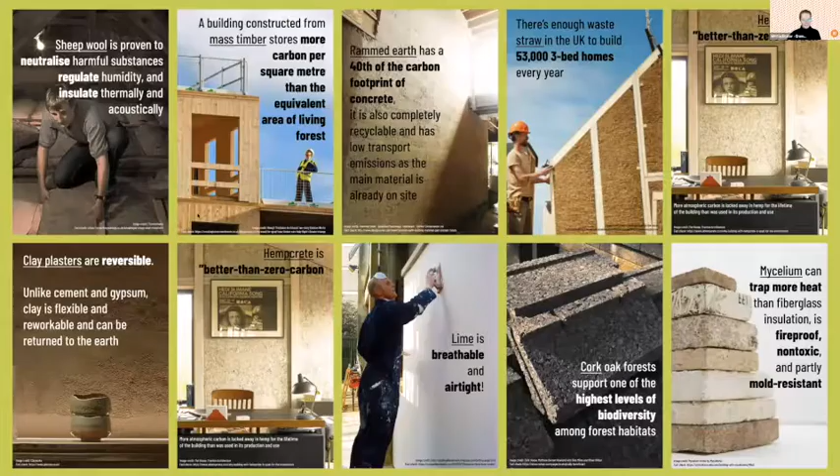Thank you, Steph. We're so glad to welcome everyone to this next event in our series of masterclasses in building with natural materials. Building with natural materials is one of the most powerful ways in which we can transform the built environment industry from being damaging and carbon intensive to something that's regenerative and truly restorative for our climate and ecologies.

We need to be looking not just at how we can reduce the damage that architecture, engineering and other built environment professions are causing, but also how we can actually be a positive force restoring the damage that we've already caused to our planet. Tonight we are focusing on hemp.

A couple of fun facts for you. Hemp is one of the fastest growing species on Earth, along with bamboo, and it has over 25,000 useful end products, from paper, textiles, rope for ships, medicine and oil, amongst many other things, some of which we're going to hear about tonight. It's estimated that for each tonne of hemp fibre grown, 2 tonnes of CO2 are absorbed and sequestered.

It's 6 times as strong as cotton, and in the 16th century, Henry VIII even made hemp cultivation obligatory as he wanted it for the production of rope.

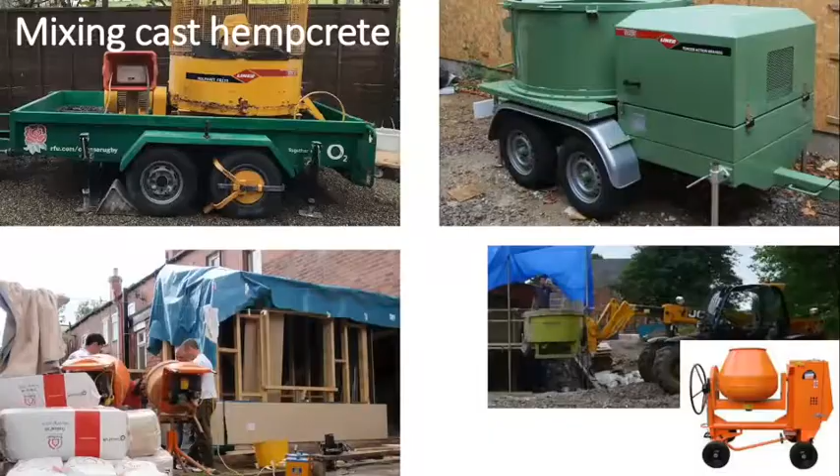I started, as most contractors do, with cast hempcrete. The lime binder and hemp shiv are mixed together with water, and these are all examples of mixers that will mix cast hempcrete on site.

You mix the ingredients together, which doesn't take long, and out comes the hempcrete, which you take in buckets to the shuttering, and in it goes. A light spread around and a prod, and you're ready for the next bucket load.

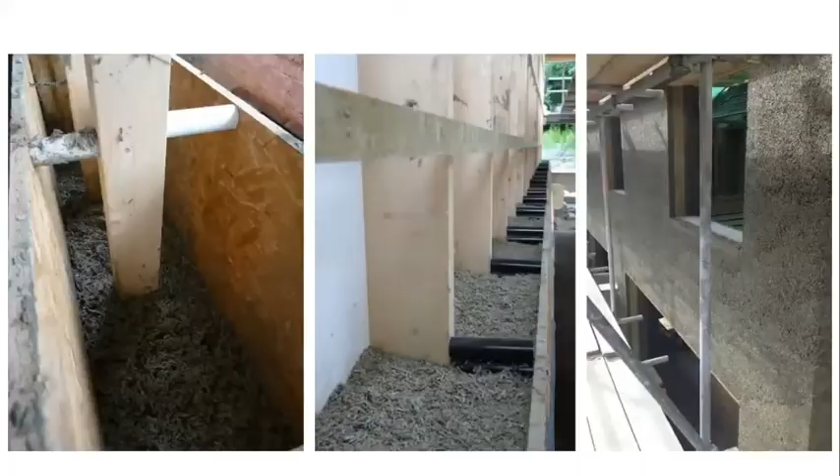You have a choice of where to put the structural frame. In the left picture, it's placed centrally. In the middle picture, it's to one side, which could be internally to take heavy fixings or externally to take cladding. And in the right-hand picture, it's placed slightly off-center towards the outside, which was dictated by the plinth design.

The hempcrete with a frame centrally or slightly off-center needs no extra support. It's engulfing the frame and can't move away from it. When the frame is to one side of the wall, the hempcrete could effectively be forced away from the frame. So as a precaution, you can see in the middle picture there are horizontal battens placed at 600 to 800 mil centers, which provides something for the hempcrete to cling onto.

The shuttering is usually OSB. It's set up like so. It's filled, then the same shuttering is moved up the wall to continue the work. The spacers cut from waste pipe are also moved up the wall as work progresses.

Shuttering can also be one of the purpose-made shuttering systems. This one that I use is extremely easy and quick to use and very solid.

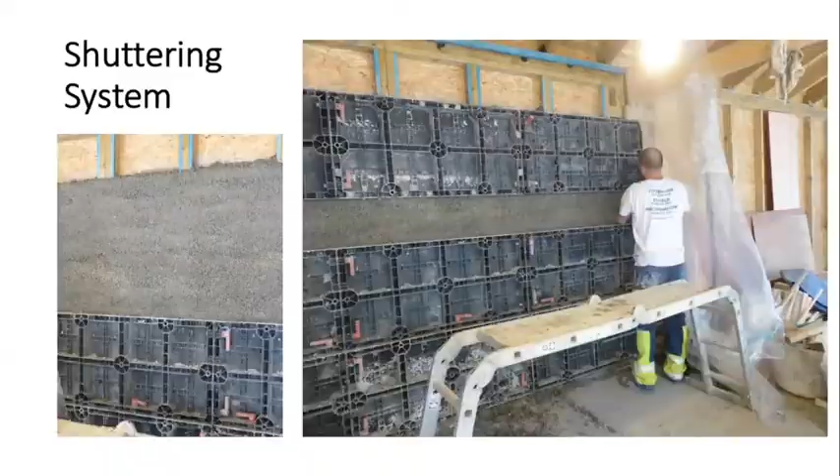My favorite thing about cast hempcrete has got to be how easy it is to plaster or render onto. It's such a nice surface to put finishes on. It's overall very flat, but also extremely textured for the plaster to cling to. And there's just the perfect amount of suction or water absorption from the hempcrete so that you can progress quickly, but without having to rush.

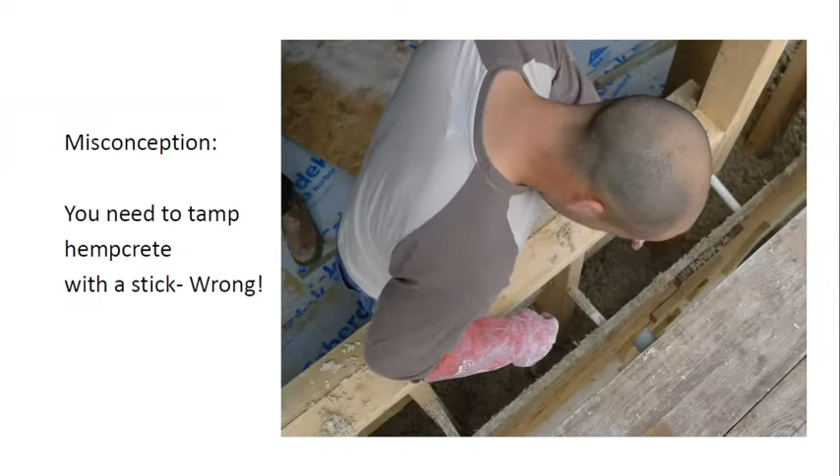A misconception with cast hempcrete is that you have to tamp it with a stick. This is not actually necessary, and it's more efficient and easier and gives better results if you use your hand. The key is not to pour too much in at a time. So you should spread one gorilla tub between about 3 of the spaces between the studs, then spread it around with your hand and give it a prod around the timbers and around the shuttering, and that's it.

Cast hempcrete is beautifully simple, but there's a lot of labour involved. And as a contractor, it becomes difficult to continue to get the casual labour you need and to manage it when you do get it. This for me was the main driver to start looking at spray machines.

Now, it would be very unfair of me to talk about sprayed hempcrete without first mentioning my good friend Graham Durrant of Hemp Lime Spray, who's put more hempcrete into buildings in the UK than the rest of us hempcreters put together.

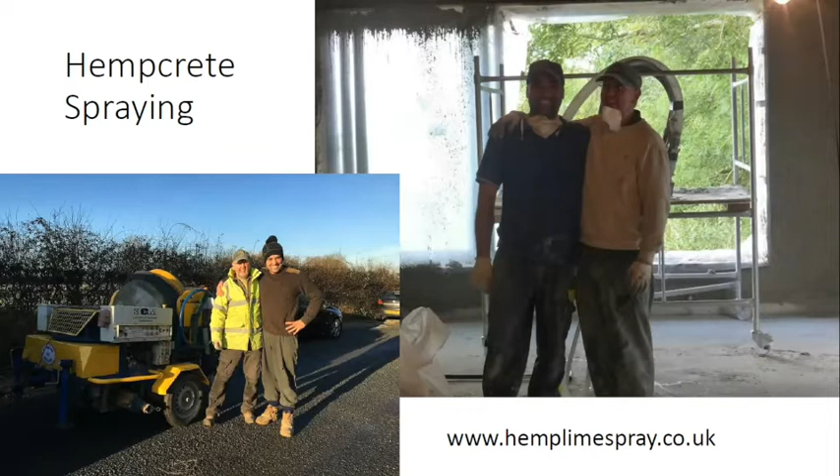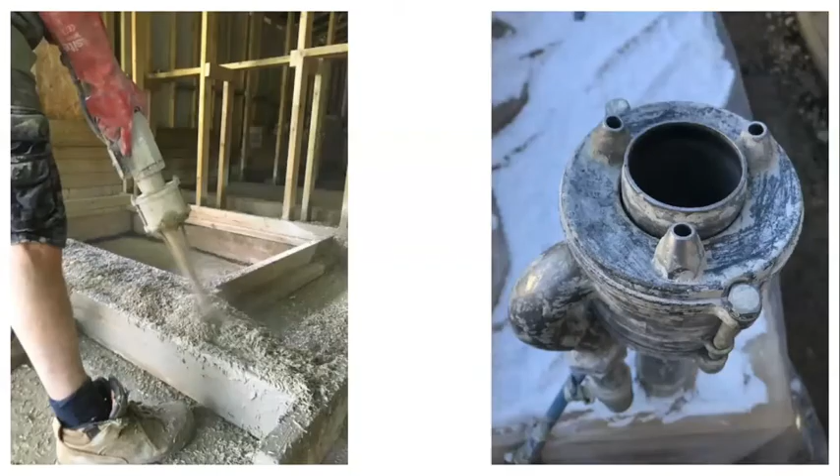The hemp and binder mix in the air between exiting the lance and hitting the wall or substrate. The binder is forced out of 3 nozzles by the compressed air, and the nozzles are angled in towards the central stream of dry hemp, as you can see here. Although it can get messy if you're not careful, it's actually quite controlled, and you can see there how close Jamie's boot is to the lance, and he's not getting covered.

Just as in cast hempcrete, if the frame is central, you need no further support. But if the frame is to one side, as in this build, then you need some extra battening for the hempcrete to cling onto and avoid any possibility of it separating from the frame.

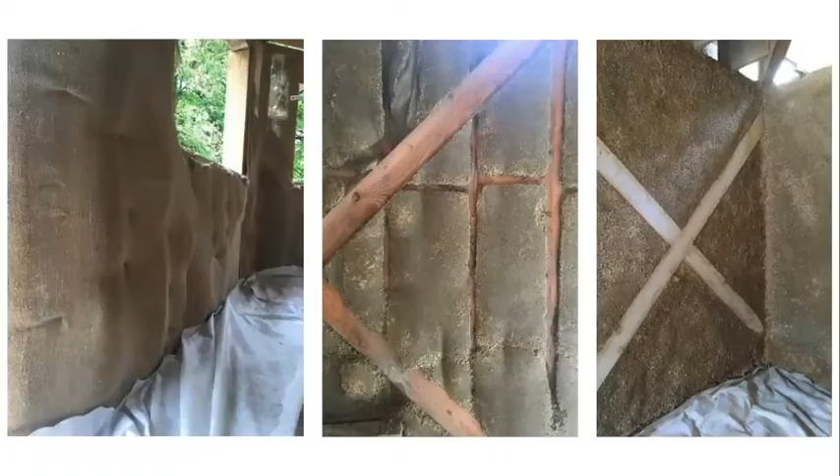Shuttering for sprayed hempcrete is very quick and can be as simple as hessian pinned to one side of the frame. The hempcrete is then sprayed onto the hessian. This is left overnight, then the next day the hessian is peeled away, as in the middle picture, and the rest of the hempcrete is then sprayed from the other side of the wall onto the previous day's work.

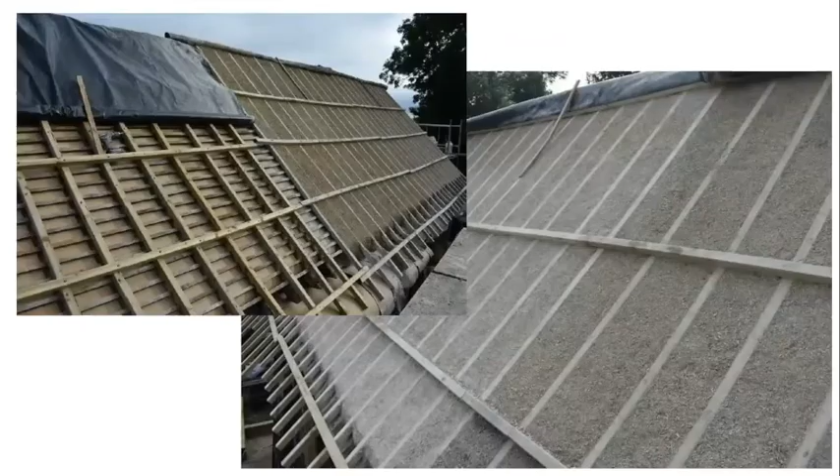Once you're happy that you're near enough flat with your walls, you get a long piece of wood, which you've banged lots of nails into to make a long and very technical scratchy stick. Graham Durrant currently has patent pending on the scratchy stick.

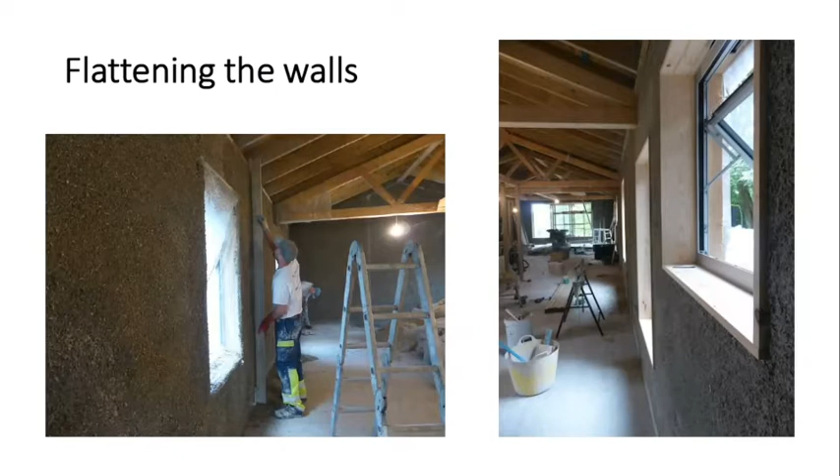You run it over the wall using predetermined guide rails that you've sprayed into the wall, one at the top and one at the bottom. If you're doing an old place with wonky walls, you can spray freehand and just tidy it up at the end with a nail float so you can keep the original contours of the wall.

Some people assume you cannot spray crisp corners and flat walls. These are a couple of sprayed window reveals on a recent build that disprove this.

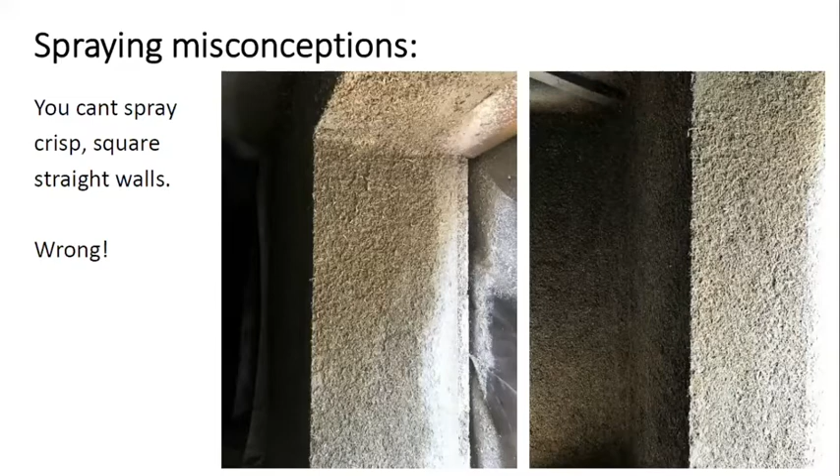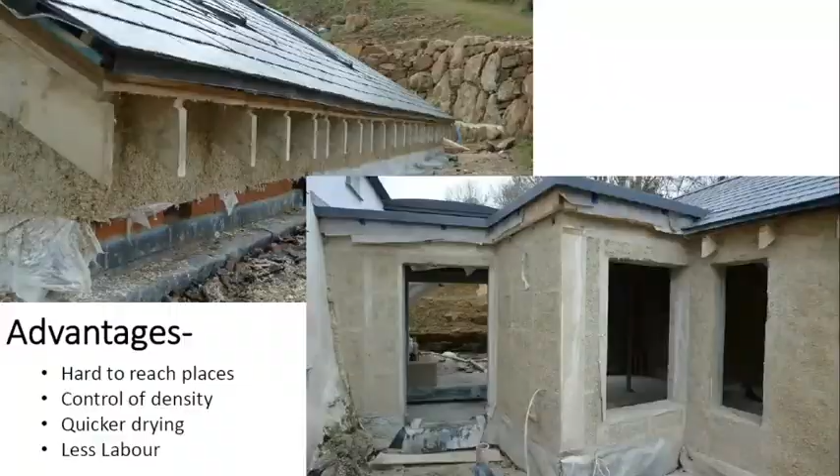Sprayed hempcrete is no quicker than cast hempcrete, but it takes a lot less labour, removes the need for carrying gorilla tubs, and in my experience, it dries quicker. These are just a couple of examples of some sprayed hempcrete buildings.

I set up production there a few years ago and it was pretty successful, but unfortunately they've had to scale back during the pandemic and are not currently producing UK blocks, although their website is worth a look at for clay blocks and other natural materials. They are, however, the main stockist for the Italian blocks imported by the Hemp Block Company, the idea being that as soon as there is enough demand, they will start up production again using the Italian recipe under license.

The main drivers for using blocks are that they are already dry and they're non-specialist. Anyone can use them and the tools are very simple and widely available. It's basically hempcrete for the masses.

The mortar is a lime mortar. It can be mixed in a cement mixer just like sand and cement, but it's sand and lime. Pretty much any lime mortar is suitable, and if you're using the giant blocks, which have a mortar line straight through the wall, you can use an insulating mortar, which has lightweight aggregate instead of sand.

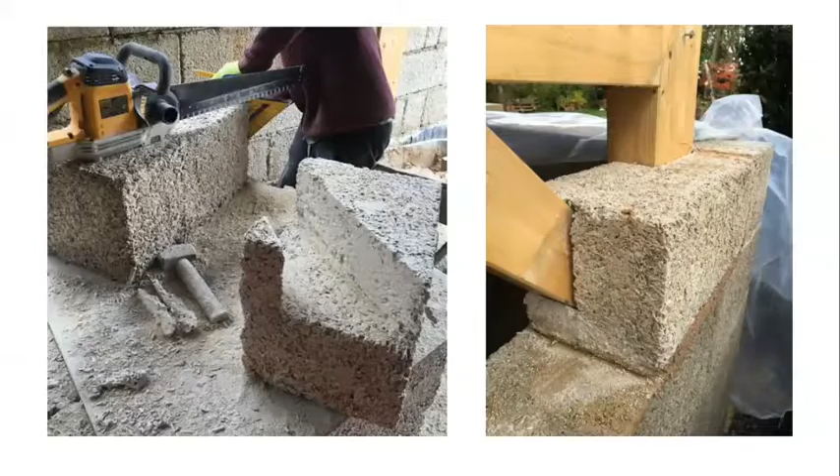The blocks are cut very easily with a hand saw, or as shown here, an alligator saw, which can do some quite elaborate cuts.

And you can find all these sections you can download from www.hempblock.co.uk.

Blocks with a portal frame is my favoured way of using them. It's incredibly simple and easy to construct and very fast.

In this build, which was built by Midlands Heritage Builders, the blocks are set 25 mil off the frame, so that once plastered, it leaves a 5 mil shadow gap between the frame and the plaster, which architects tend to go mad for.

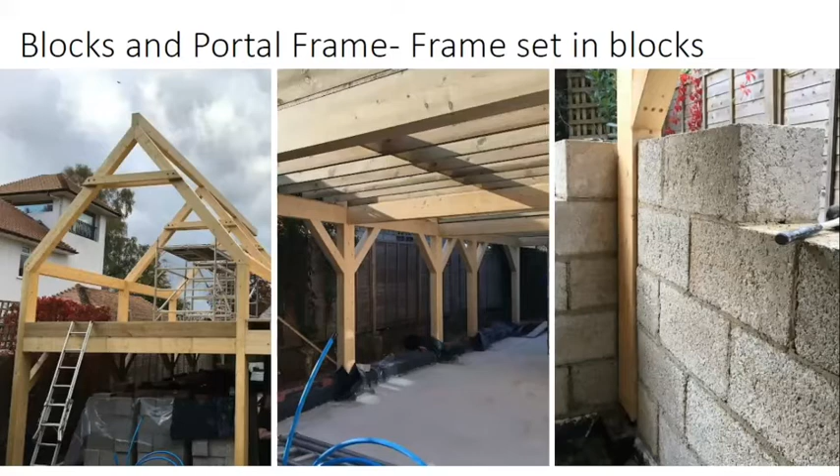You can also set the frame into the blocks, but still have it on show, as in this build. So if you were thinking of having a feature frame anyway, like an oak or glulam, then I'd really recommend looking at the giant blocks and this way of building.

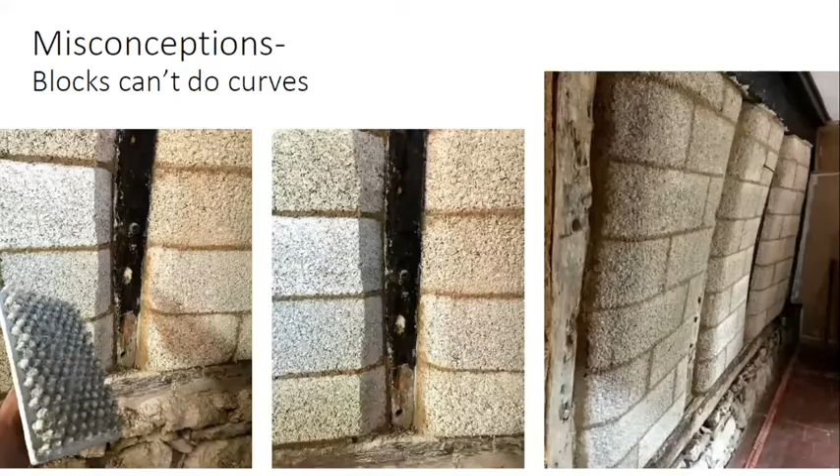I'm increasingly using blocks as a permanent shuttering for sprayed hempcrete. They're built up usually on the inside of the wall and either cast or sprayed against from the outside. This means the inside of the house is already dry and ready for plastering, whilst maintaining the benefits of monolithic construction that the cast or sprayed hempcrete bring.

On the left there, you can just make out the blocks on the inside of the frame and the spray on the outside.

So really the three types are very similar and can be used in much the same way. Cast is specialist, but still very simple and accessible for self-builders. Sprayed is easier for contractors to manage due to the much reduced labour required, and comes into its own when projecting it at an existing wall as solid wall insulation. And the blocks have massive advantages in being dry, but are also completely non-specialised and accessible to all.

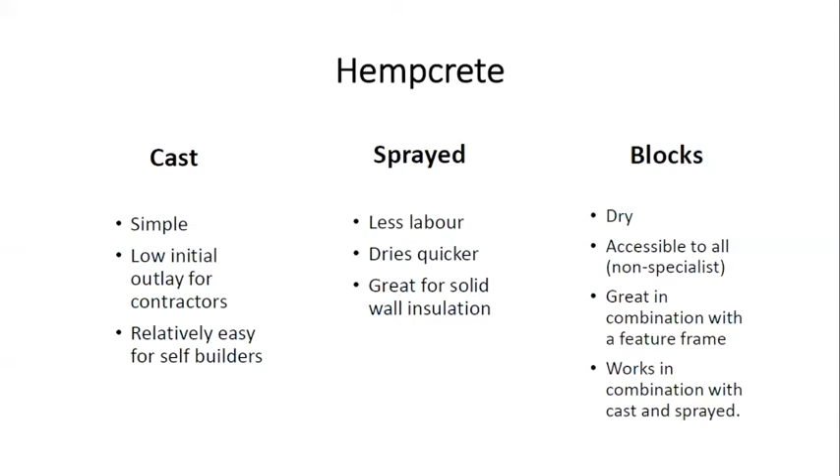I'm going to look at some construction details now. It's difficult to do them in depth in the time we have, but we'll look at a few common details.

The first is racking strength, or stiffening of the frame. The rule here is to avoid using boards such as plywood or OSB. These boards are generally very impermeable to moisture. They'll cause a condensation risk in an otherwise breathable wall and will generally not let the hempcrete perform as well as it can.

As moisture travels through the wall, it hits these boards and will slow down. In the case of plywood, it would just stop. If the board is cold, say towards the outside of the wall, the moisture will then condensate and cause damp. So the rule of thumb would be to have more insulation outside of the board than inside of it, so that it's warm.

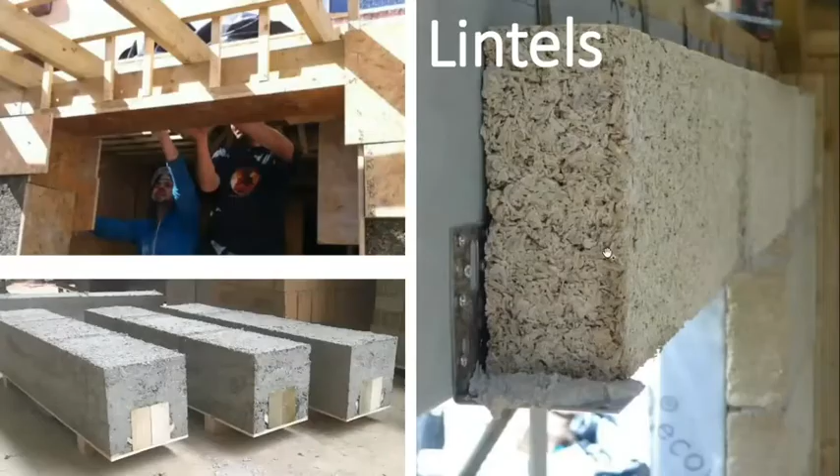Sprayed and cast lintels for sprayed and cast hempcrete are very similar. The stud frame will always have its own structural lintel in place, so you're really just making sure that the load of the hempcrete transfers across the opening or back to the structural lintel.

For small openings, top left, you'd build your hempcrete up to either side of the lintel. You'd then place a 2x2 or 50x50 mil batten in the middle of the hempcrete section, right the way across and projecting 150 mil into the hempcrete. Then you'd cast this whole section in one go without stopping, and the 2x2 batten acts like a rebar. For a larger opening, for cast or sprayed, you would screw a slightly bigger timber to the structural lintel, and again cast or spray it in one go. This transfers the load to the structural timber frame lintel rather than the hempcrete on either side.

For small blocks, the load is transferred back to the structural lintel as shown on the right hand side, with stainless steel L brackets at each block joint. So that's very simple.

And for the giant blocks around a portal frame, precast hempcrete lintels can be produced, which are reinforced with structural timber as shown in the picture on the bottom left.

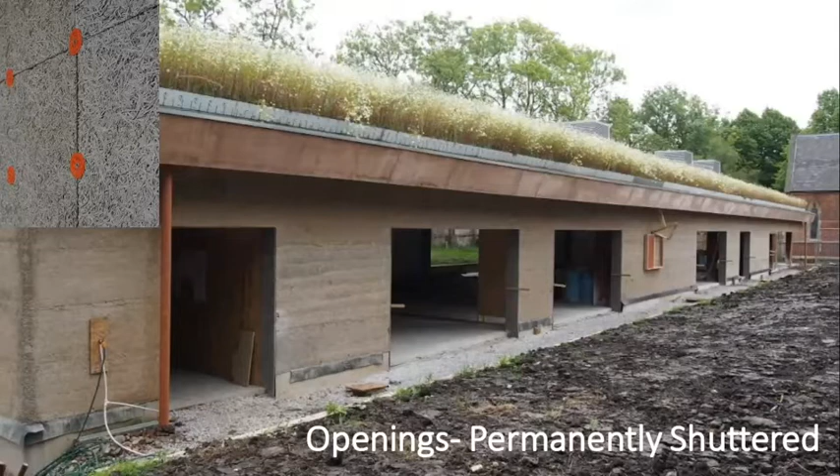I prefer using wood wool board because it's the same texture and porosity as hempcrete. So when you're plastering or rendering, you can treat it the same as the hempcrete and you don't get cracks that would otherwise be risked by using a dissimilar material or board.

These windows I've permanently shuttered with the finished timber surrounds and sprayed up to them. I left enough space for the plaster to finish flush with the timber window surround. Then a kind of face frame, a bit like an architrave, was fixed onto the front once the plastering had been done, so that was very quick and easy. The boards were put in place before I hempcreted, sprayed against, obviously they were protected, and they're there once you take the protection down.

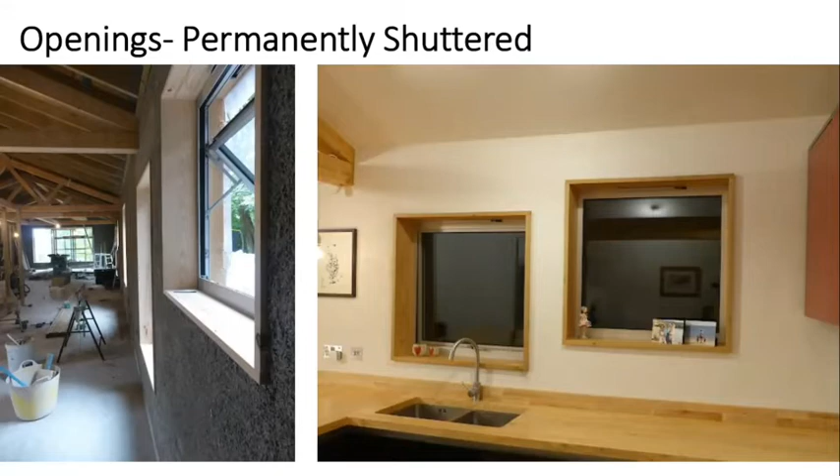Then the rafters are full filled with blown cellulose insulation, which is blown in under pressure and meets the back of the hempcrete wall, further increasing the air tightness.

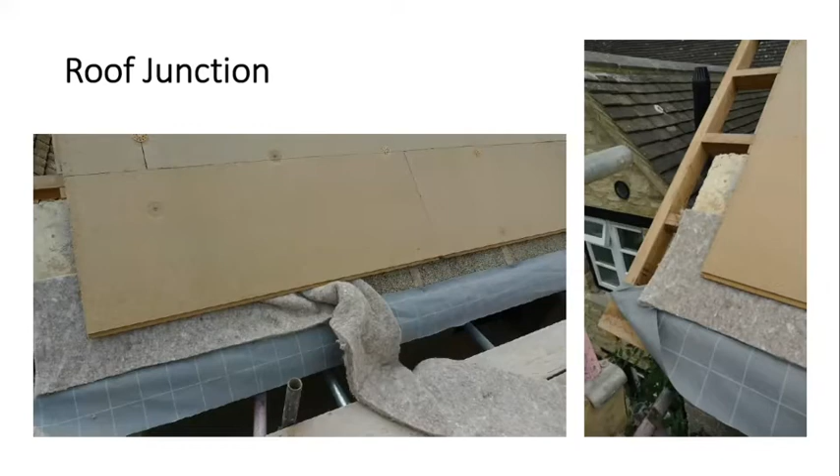There are so many ways a plinth can be constructed. So for now, all I'm going to say is that it must keep the hempcrete at least 250 mil off the ground if the hempcrete is to be rendered.

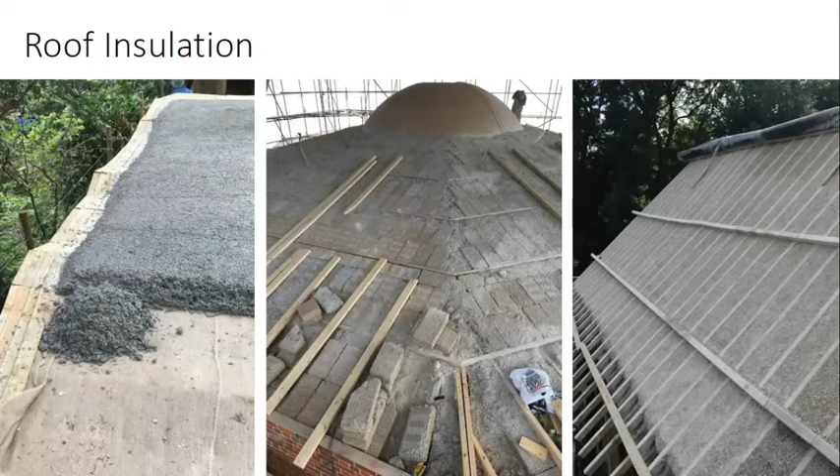Sprayed, cast and blocks can largely do all the same roles. They can all do walls and roofs. Cast roof on the left there, block roof in the center, and a sprayed roof on the right.

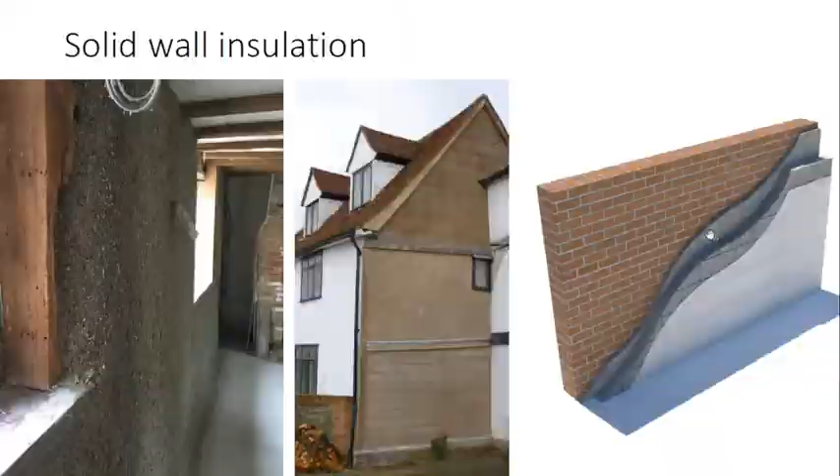So let's compare them on cost. The easiest way I thought I would do this was to look through my back catalogue of jobs and see what I actually charge my clients. For each, I've noted down my lowest and highest price I've charged for sprayed hemp, cast hemp, and the hemp blocks. This is a supplied and fitted cost and is per cubic metre. So if you want to know it per square metre of wall, you'd have to divide the cost by the thickness of the wall in metres.

As I could have guessed, the spray comes out cheapest due mainly to the lower labour cost, followed by blocks and then cast.

What was interesting is that the larger the block, the cheaper the price per cubic metre. The giant blocks were at the lower end, £450 per cubic metre fitted, and the price increases for smaller blocks. This is because it takes roughly the same amount of time to lay an 80 mil thick block as a 160 mil thick block, but you get twice the hempcrete. It's worth considering though that this is what I would charge, and your local builder could install the blocks for a lot less than I would.

Also bear in mind that if you lived far from someone who owned a spray machine, say in North Wales, but close to a local hempcreter, let's say North Wales' very own Hempcrete Cymru, then the cast hempcrete by your local Welsh lad would probably be cheaper than me travelling from the southeast of England with a spray machine. Quick shout out to my cousin Jasper and his business partner doing great things at www.hempcretecymru.com.

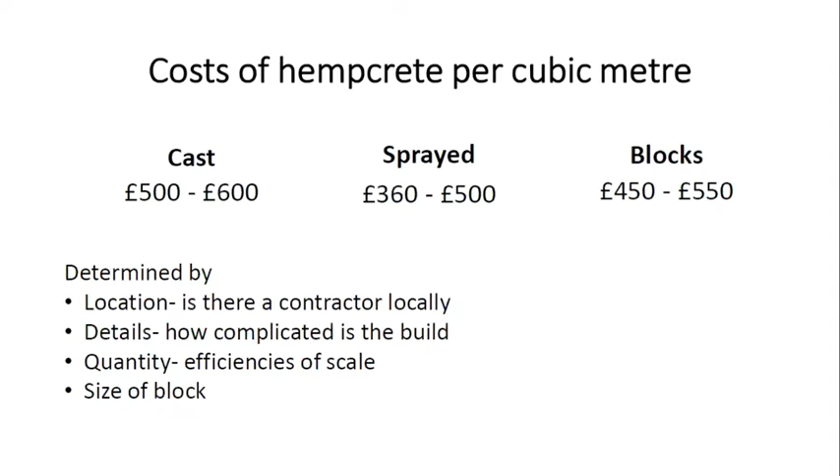Don't forget, you can mix and match in the same build and combine hempcrete with other natural materials. So on that subject, I've been asked to say a little bit about mortgages and my experience of self-building and mortgaging a hempcrete house.

There's a certain material that can help with this. I know some people struggle with natural materials and mortgages, but that can sometimes be the way they approach and present their build to the mortgage company, saying things like, hey, I'm building a hemp house. And the mortgage company say, what the hell is that? And they close the door.

But in fact, you're not building a hemp house. You're building a structural timber framed house with natural fibre insulation called hempcrete, externally finished with lime render or timber cladding. And then they say, hey, we deal with timber frame buildings, please come in.

Of the mortgage companies that lend on timber frame builds, some will state that you can only timber clad a certain percentage of the external facade due to fire risk. Other than that, the lenders say it must adhere to building regulations, be insurable and have a 10-year structural warranty.

So really then your main problem is finding a warranty provider and seeing what their criteria is. But it didn't take me long to realise they're only really interested in the structure and the external weatherproof finishes. The structure must be signed off by an engineer with up-to-date liability insurance, which is not difficult to do. And the weatherproof finish must be guaranteed for at least 10 years, which can be slightly more difficult.

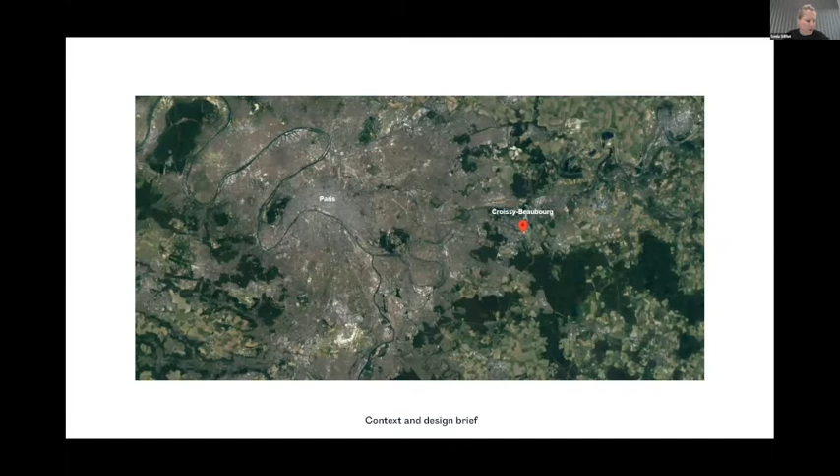Croissy-Beaubourg is a suburban commune of Seine-et-Marne. As you can see, this is Paris and this is Croissy-Beaubourg. The characteristic of this typical urban fabric is a strong dominant residential presence, as you can see here, all over. This is the site and this is the building.

As an echo to the city center, the project is a new multipurpose sports hall located in the center of a set of public facilities. As you can see, here is a school, a gymnasium, and a leisure center.

In addition to this particular context, it's important to clarify that this project is not the result of an architectural competition, as is usually done.

In France, we developed a specific process called procédure adaptée, which could be translated as adapted process. The word adapted is important since it illustrates the aim of adapting a project to a budget beyond any architectural consideration. The scheme is presented as a proposal mainly based on the methodology and capacity of our office to propose a solution able to find the good scale for the municipality.

It means that when we started the contract, we had to design the building, find the right implementation in the context, and define all the characteristics of the future building. So that was the first images that we showed to the municipality when we just started the project.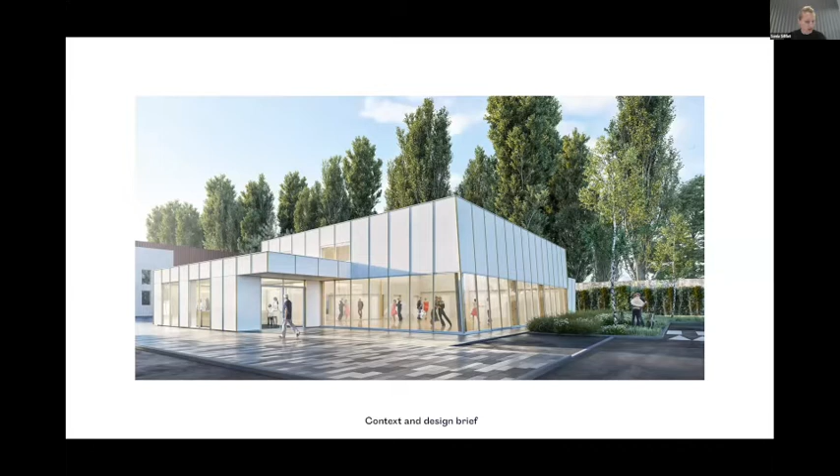In response to a constrained budget, it was estimated in the design brief around 650,000 euros, so almost 550,000 British pounds, I would say.

The structural principle of the project was guided by the desire to use sustainable and multi-performing materials. My engineers proposed that we use hemp block during a meeting.

We had never heard about hemp blocks before. Of course I had seen operations done with concrete-hemp cast in place, but I was not aware of this type of hemp-made product. He described to me all the benefits of using that specific type of material for our project, like versatility, thermal, acoustic, structural, and fire resistance performance.

Also, this was a good point for us: the hemp is grown in France, and the fibers are assembled within 500 kilometers from the project site. So the hemp blocks participate in valuing a short-term sector. Here you can see the building site bird's-eye view.

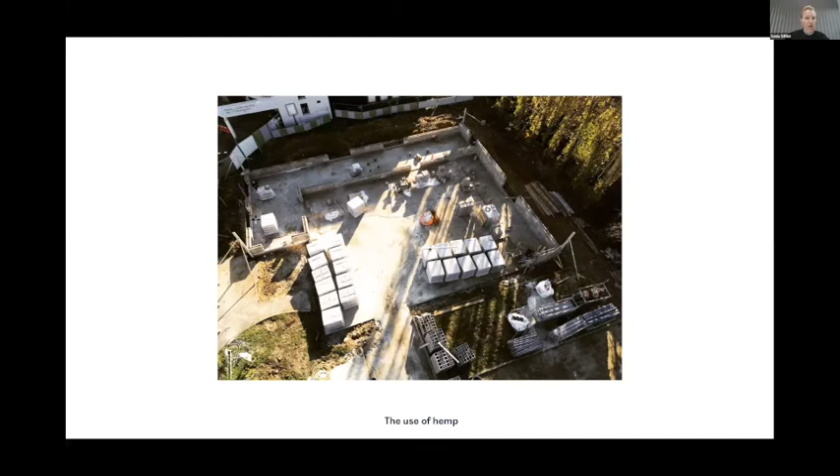The Pierre Chevet Sports Hall is the first public building built with hemp blocks in France. This constructive process was possible to respond to certain requirements. On the one hand, it participates in engaging the actors of the building sector toward an ecological transition.

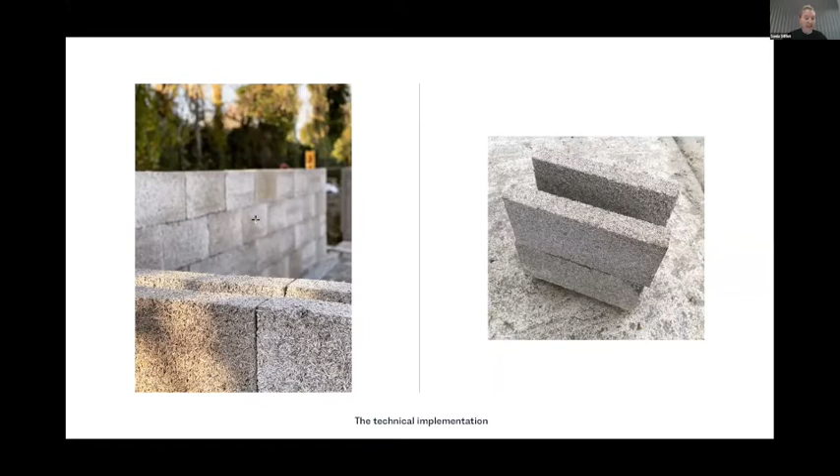The project provided an opportunity to mentor companies in these techniques. On the other hand, the constructive technique does not require specific certification or qualification. For example, on a small-scale project such as Pierre Chevet, small local businesses were not excluded and could therefore respond to the call for tenders.

Similar to our traditional cinder blocks, these products are based on chenevotte, a French word - I don't know how to say it in English. It comes from the inner part of the stem, also called straw, which is then cut mechanically to obtain hemp shaving. This is an agricultural material, until then without outlets.

This base is made very compact thanks to a quick natural cement binder developed by Vicat, a French cement group based in my native region, Rhône-Alpes. This is the picture of the product we use - that one is from Vicat's marketing material, and on the other hand, this is from the building site.

Measuring 60 by 30 by 30 centimeters, the weight is almost 18 kilos, and it's easy to cut. The blocks are not glued, as you can see.

They are just nested together. The funny fact is that the guy working on this building site was a former stone cutter, and he found the same technique that he was using in stereotomy.

So I will explain a little bit more about the structure of the building, how it was designed to free up as much space as possible for this really small project.

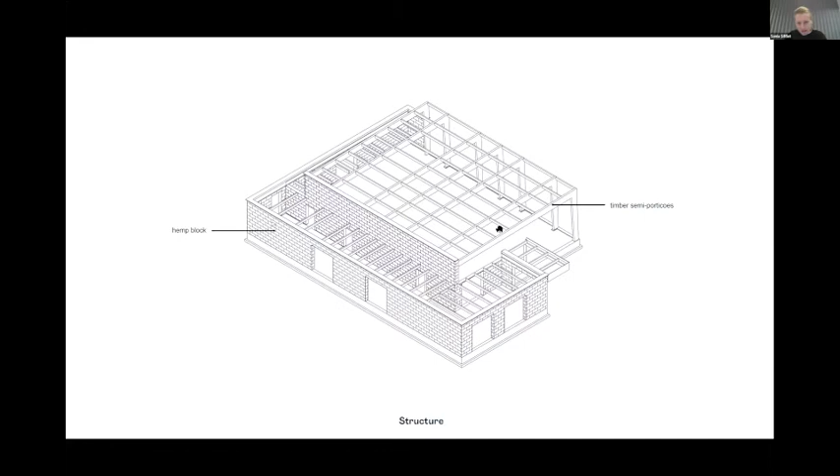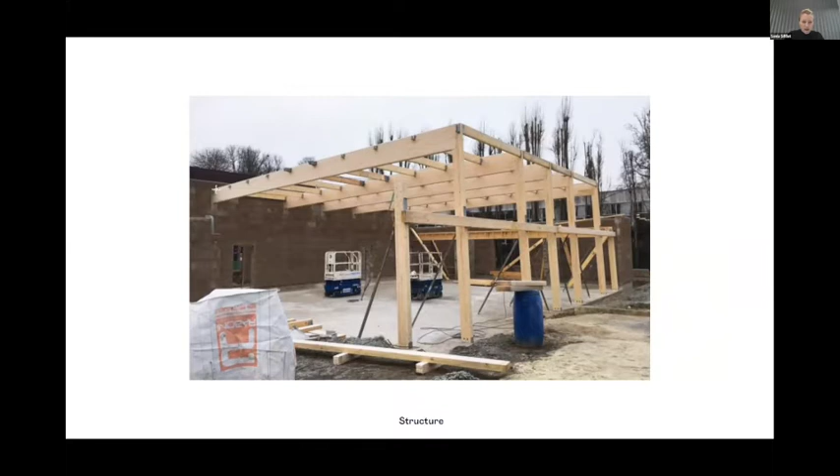So because we wanted to offer durability to the facade, we decided to use full height fiber cement panels, keeping the standard format, as you can see here. That was the starting point to do the pattern layout of all the facade.

But how to attach 10 millimeter thick and heavy cladding panels, almost 18 kilos per square meter, to a hemp wall? Throughout the project, we were able to discuss with the head of Vicat, the manufacturer, who developed the technical requirements for hemp blocks.

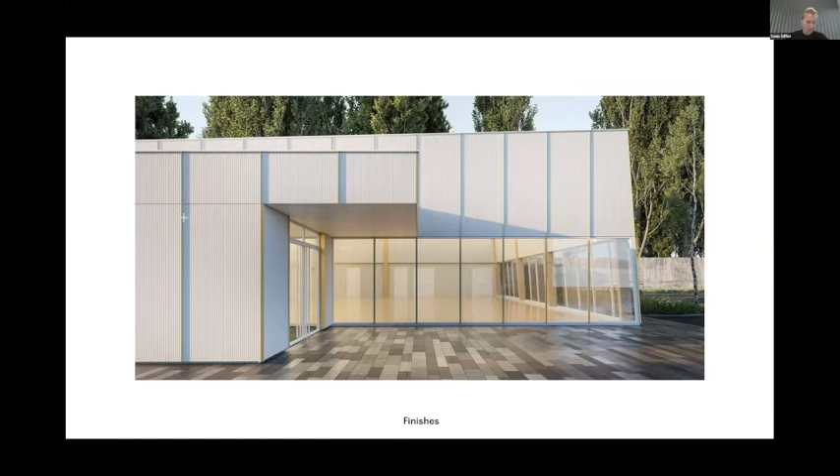I must say this project was a collective work between each partner: our office, the engineers, the manufacturer, the people working on the building site. Pierre from Vicat intervened on that question with the facade, as you can see here, because it was the first time a facade panel was fixed to this kind of wall. We had to review the hook system, as it was impossible to create intermediate points.

The waterproofing was made with a simple primer coat applied to the hemp blocks prior to the panel installation. So that's the final result here.

Here you can see a small section: the hemp blocks here, the primer coat on the outside, the omega metal profile, and here is the front panel. So we started from that small concrete block part here and went up to the top, like 3 meters higher.

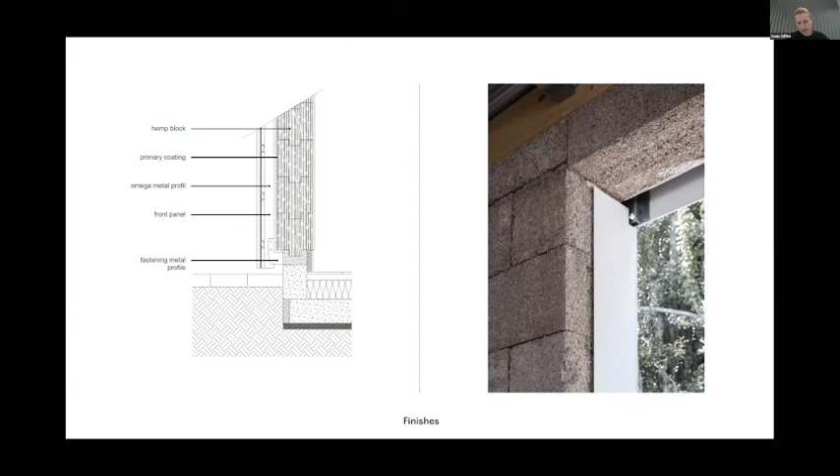And this is a detail from the inside, as you can see, the window coating here.

So as you can see, this is the inner facade surface here, treated with hemp coating in the lower part. Free of insulation and gypsum board, hemp blocks also offer a sound absorption property.

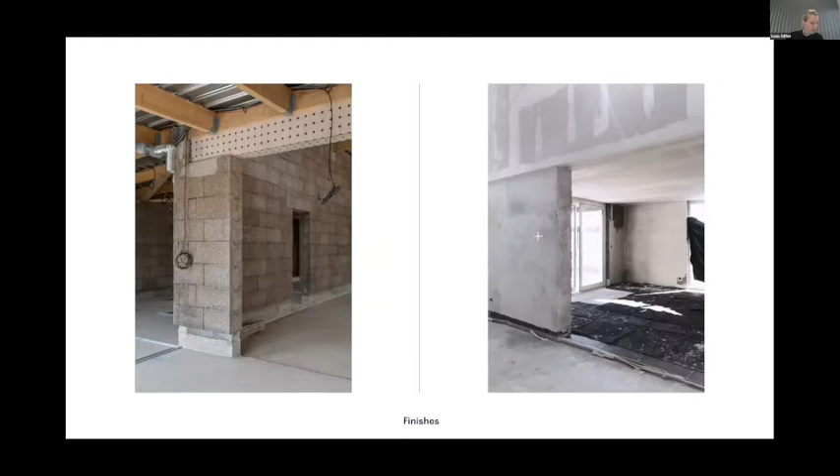It's almost 43 dBs. That's why in the highest part of the dancing room, the blocks are left visible, in order to preserve the aesthetic qualities of the hemp block.

We have estimated an additional cost of about 30 to 40% on the supplied product price, which out of the total amount of the operation represents 2% of the construction's global cost.

This is the main room when we finished the building.

The main challenge was to convince the client that hemp is a good alternative to concrete, because since the beginning, the municipality had no specific requirement about the use of bio-sourced products. They were not involved at the time of what was being prescribed and stopped at the word cinder block.

We had to explain that these materials allow sustainable savings in a long-term approach. It can represent, according to some studies, up to 70% of heat saving in the case of a building with high thermal performance. According to modeling done by our engineers, primary energy consumption is estimated at 167 kilowatts per square meter per year, with gas consumption reduced to 42.7 kilowatts.

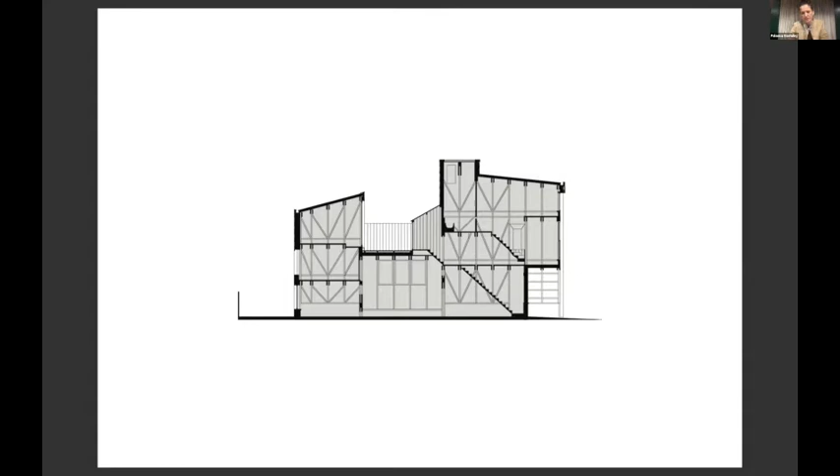So the first project I'm going to talk about is what we call the Weaver Studio, in South London. It's a studio on the ground floor with two apartments above. It's a project that developed around this quite solid, maybe oversized, timber frame made of locally sourced Douglas fir. The constraints of the project meant we had to build it effectively by hand, using the structural timber frame itself as the scaffolding, because there wasn't space around the site to erect one.

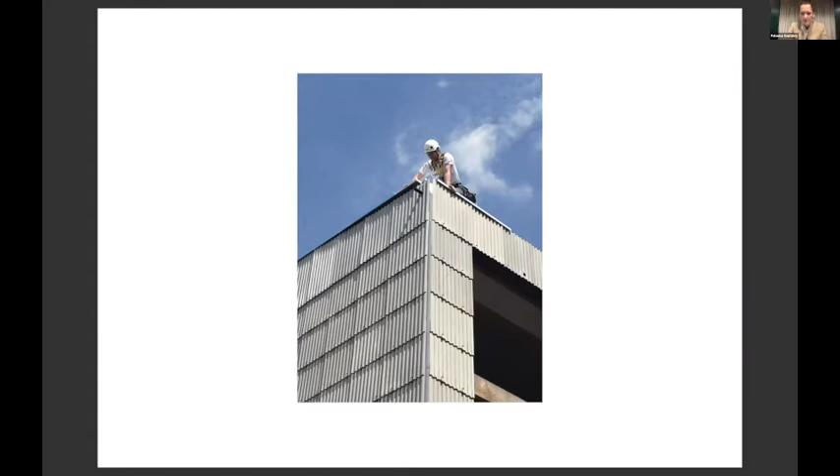So we were looking at materials that would work with the constraints of the project, and also the desire to really show off this structural frame. In the end, running through our shortlist of materials, hemp just kept ending up at the top for many, many reasons, not least its sustainable or ecological credentials.

So we built the building almost like a giant barn. The structure went up, the floors went in, and then it was clad - the exterior cladding was put in alongside the wood wool board, which you can see in this image. So we have this big structural frame, then wood wool here, and battens which support the exterior cladding. The wood wool, as described and consulted on by Will - I think he came up with this detail for this project - provides a permanent shuttering in the building, so it just goes on and stays there, and is the substrate for the hempcrete that came later.

So this is us casting the hempcrete, very lo-fi, just a few hired cement mixers and a lot of labour. We called in everyone we knew almost to come and help install the hemp. You can see the hemp shiv in the foreground here, the woody core of the plant. It's very good at storing air, it's got a kind of spongy texture, so it holds its structure even when mixed with the lime. And here, in the foreground, that's the lime binder.

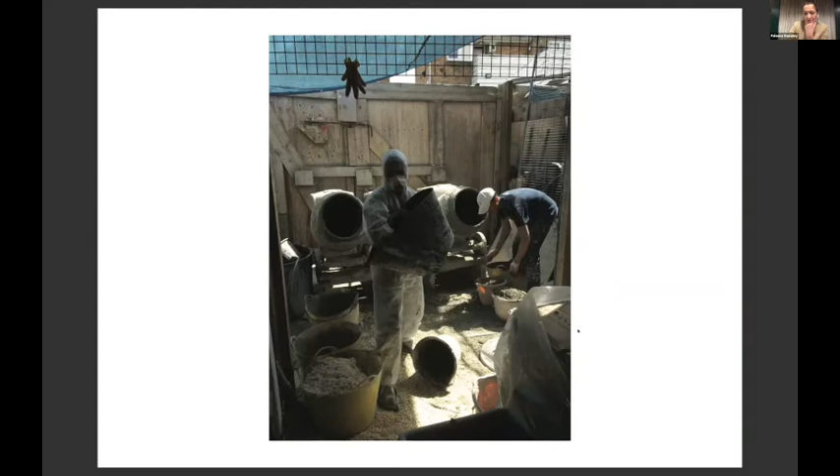They both go in together into a cement mixer, and then you get it in the shuttering. So we were casting in situ, building up in layers that form these strata that become quite a beautiful visual record of this process of tamping in and building up the hempcrete.

This is the binder before it's fully cured. So there's this stage when it all went quite this deep murky green, which we actually quite liked. But when it dried, it dries quite a lot lighter.

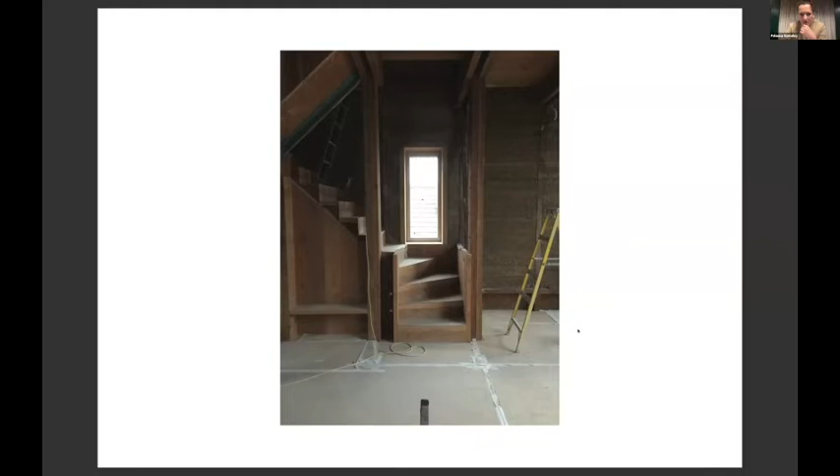This is the ground floor of the building, so the workshop. And there were elements where we wanted to reveal the full depth of the structure. So we had a different insulated approach in some areas of the building, but the majority of it was just cast in situ hemp right up to the face of the structure.

So the shuttering in this case was screwed directly onto the front of the frame, which means it ended up with this kind of flush hempcrete.

And I think from this project and a few other projects that we'd done prior to it, we began in practice architecture to develop a few principles. So this idea that's already been touched on of monolithic construction.

So the idea of eschewing this very layered construction, which we've become very used to, and I think which is developed in the context of a petrochemical based material economy, and also the idea that moisture shouldn't move across a building, but should be kept outside a building fabric on either side, and then kind of liability warranty based cultures as well.

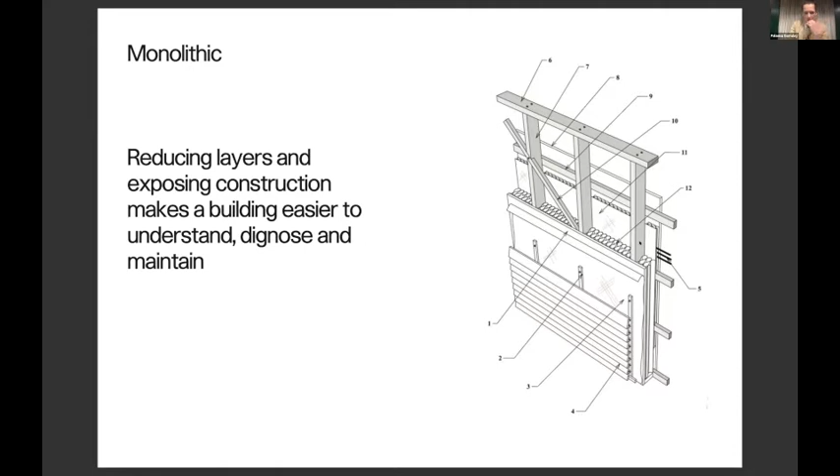We've ended up with this very fragmented, layered building technology. So one of the really exciting things about hempcrete is that it simplifies that right back, and you can have just 1, 2, 3 materials as your entire wall build up, which feels really exciting, and makes construction much more accessible again, less technocratic.

The other thing is using biogenic materials, the materials that have been grown essentially, and that sequester carbon and lock it away as they grow. Breathing construction, so allowing moisture to move across

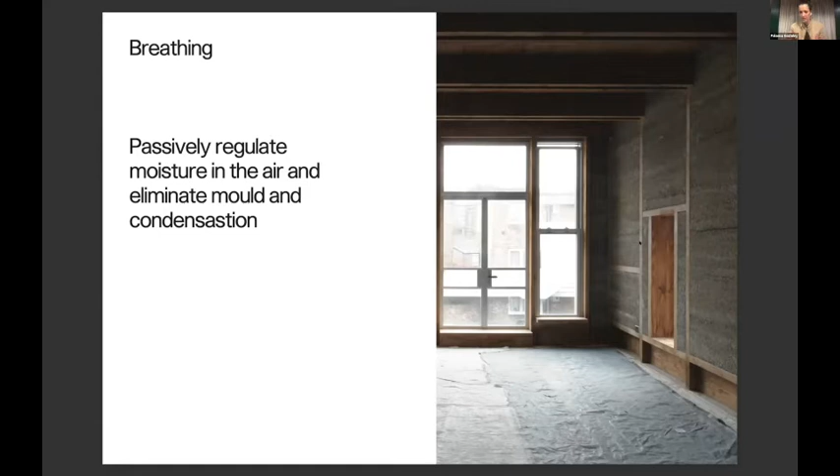the fabric of a building, the wall of a building, which has so many benefits. So modulating the amount of moisture internally, reducing mold, etc.

And then also this idea of resilience, so designing for passive fire resistance, and that means for timber, just oversizing timber rather than using intumescent coatings. And then with hempcrete, it's inherently fire resistant just because of the lime content. So it gives you a lot of things in terms of performance.

Another principle for us is the compostability. So at the end of a material's life, or a building's life cycle, the materials used in that building, or at least the gross majority of them, can be essentially mulched and composted and returned to the ground and into biogenic life cycles.

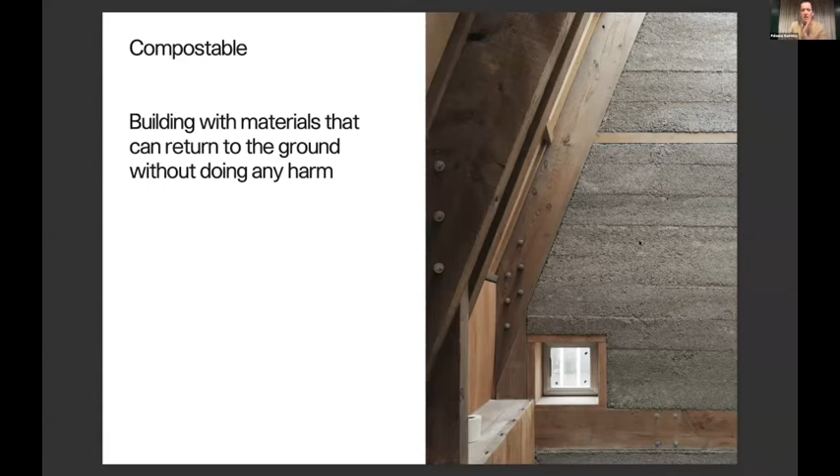But I think something that we began to feel in relation to these kind of one-off bespoke projects was that whilst they can be really useful in terms of experimentation and discovery and learning, if we want these technologies and ideas to spread, we need to also look at how they can scale and be competitive with the existing material cultures.

And in response to that, we established this organization, which is research but also design organization, looking at how low embodied carbon materials can intersect with the latest construction technology in highly efficient processes. So Material Cultures is part research center, part laboratory. We build buildings at different scales to test things out, and we also work in an educational capacity as well.

So Flat House was the first project that began to manifest some of these ideas, and was part practice architecture, part the birth of Material Cultures, and was a house on a farm called Margent Farm in Cambridgeshire, for which we grew all of the hemp used in its construction.

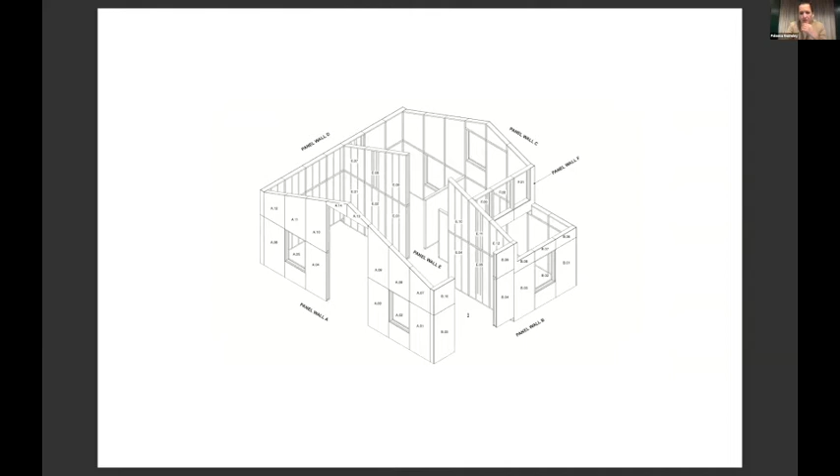So the first process almost in building the house was to grow the materials. So we planted a crop at the beginning of the growing season and harvested it 3 months later. And from there it was processed. So the shiv was used to form hempcrete, which went into these panels. We devised a very simple structural system based around the 8x4 sheet, so just a regular dimension.

I think my new little friend is coming upstairs, so she might get even louder.

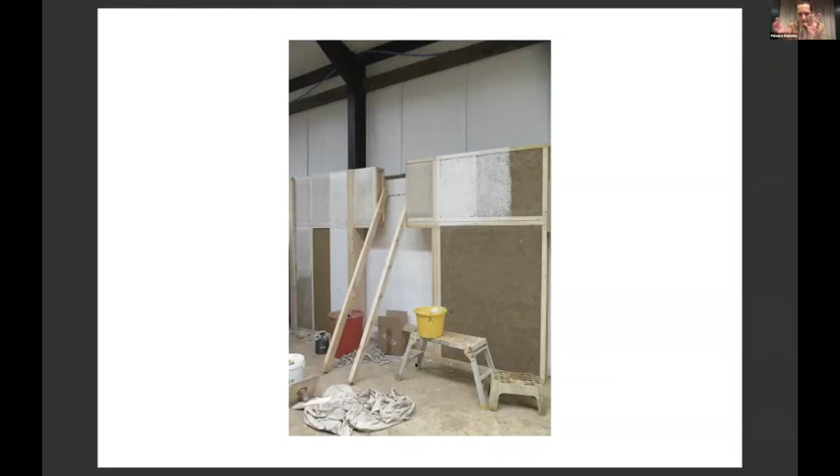That hempcrete was cast into these panels. You can see they're kind of coded, so essentially we could get them into place quite quickly on site. We explored different finishes, so how you could essentially seal the hempcrete, whether that be with a lime plaster or a wash of paint, and whether that process would happen before or after its assembly on site. This is the assembly on site, and you can see the conditions weren't great, but also it's a very simple and in a way quite crude process. These panels had the conduit pre-installed, which was probably the most high-tech bit about the project, and then some quite basic, if oversized, tools with which to get things into place.

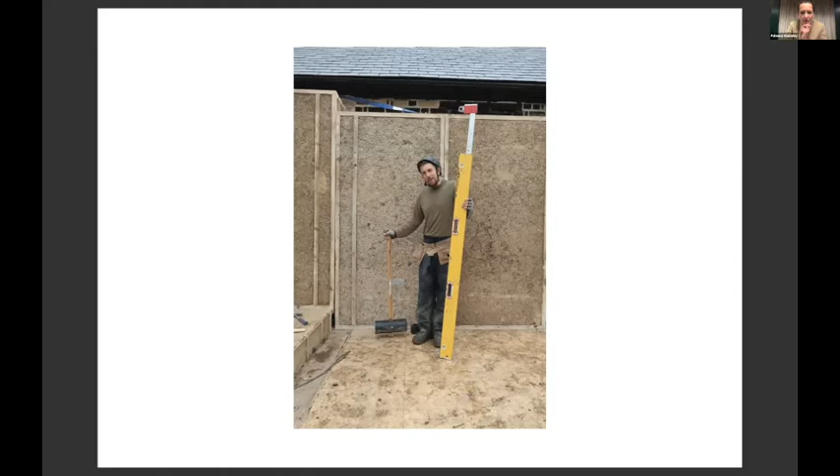We basically used a crane, and over 2 days put all of the panels up, and had the base fabric of the house very quickly. So it was a real shift, I think, from the project that I just showed you, in that the speed on site was just extraordinary.

In terms of a rationalization for mass construction, what off-site construction means is that all of those drying processes happen somewhere else, and potentially in an assisted manner. So you can essentially dry with cold air or warm air before they even arrive on site, which means that the construction window becomes year-round, rather than in situ hemp, which you can't do in the coldest months of the year.

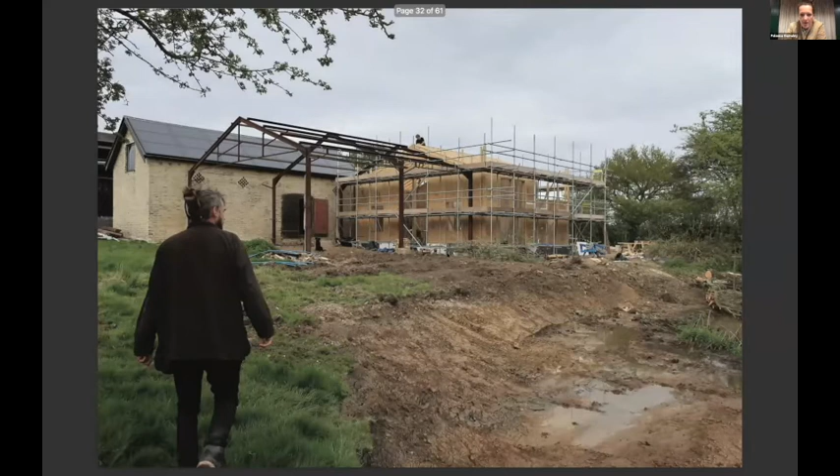This just kind of gives you a sense of the form, but also that we were doing it under Class Q permitted development, which meant that the volume of the building essentially followed the existing shed.

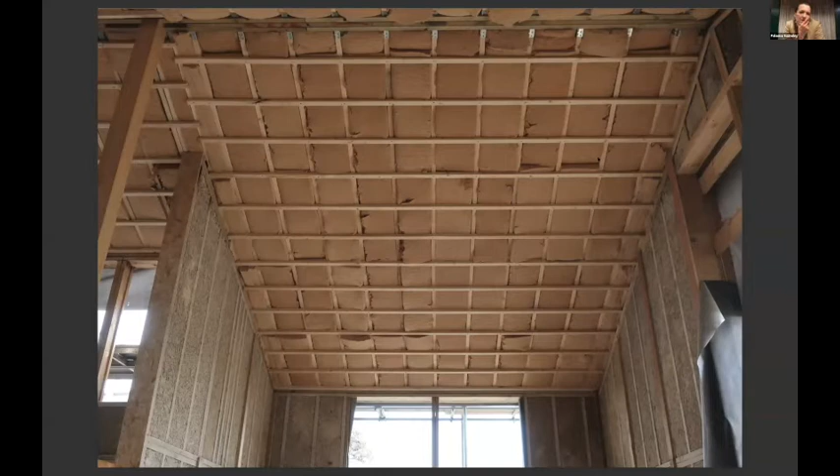Following on from what Will was describing, working in conjunction with other materials, this is wood fibre insulation. It could equally as well be hemp fibre insulation, which is now being made in Scotland by IndiNature. We used it in the ceiling and the floor, and also as a kind of outer jacket on the outside of the building.

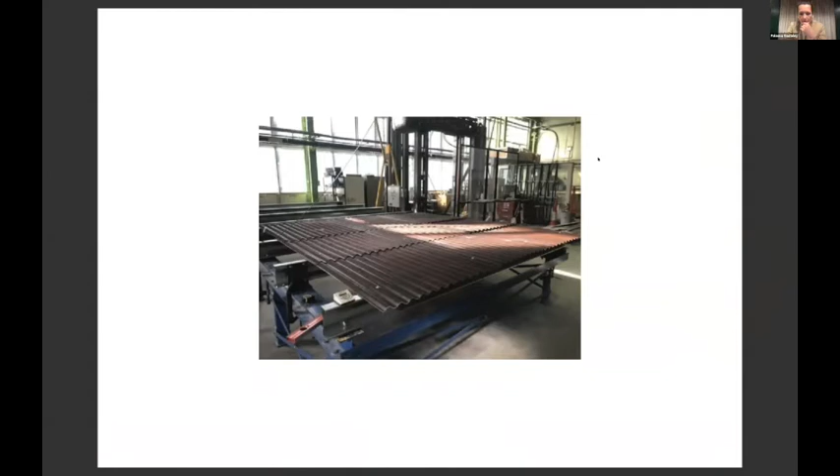In parallel to this project, we were also working with Margent Farm to develop a cladding product which used the other part of the plant. From the stalk of the hemp plant, you have the shiv and you have fibre. So the fibre of the plant was used, combined with a sugar-based resin and compressed into these panels, which then clad the building. It's changed a lot now, because you kind of have to see hemp fibre as a natural product, and it behaves almost like timber does, and it silvers and lightens over time with UV exposure. It's in the process of being kind of launched as a product that should be available. We're fast learning through that process the difficulties and the hurdles there are to overcome in bringing something new to market, particularly when it's a natural or bio-based product.

It seems like they almost make it even harder for you. So that's, I think, one of the things that we're also looking to explore and enable.

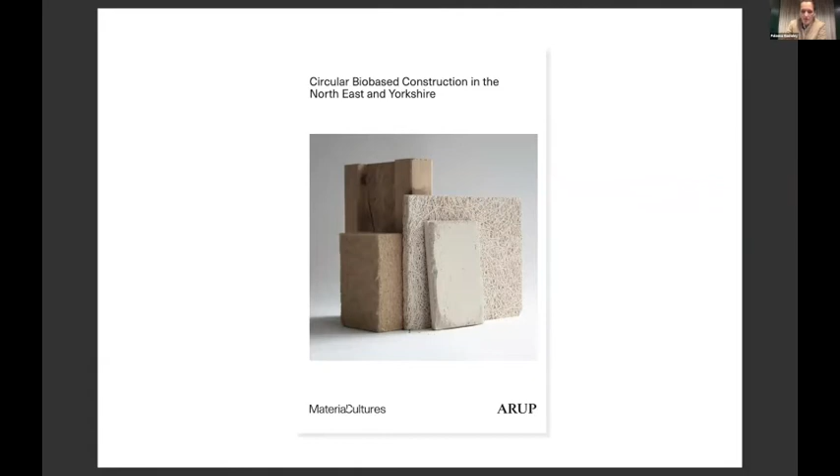We're now looking at regional scaling with a number of projects. So this is kind of material cultures work. This was a report that we did in collaboration with Arup, which looked at Yorkshire and the Northeast in particular, and we focused in on hemp. Yorkshire is the largest grower of hemp currently in the country.

And in terms of insulation, we were focusing on hempcrete and hemp fibre batts. So that's hempcrete with the hemp hurds, and the fibre batts with the fibre that comes from the stalk. And then looking at what the implication of a shift to bio-based construction might mean in terms of landscape and agriculture.

So in order to build the 30,000 homes that the region requires, if all of those were built with a hemp fibre batt, you would require 8.6% of the total land area to be growing hemp, which seems like a lot, but that's only considering the fibre as an output of that land area. So you'd also have the oil, the shiv, etc.

But it's also an interesting insight into what would be required were we to actually make this transition. And as we mentioned before, hemp as a plant has the ability to be integrated into other growing cycles as a crop rotation, because it helps rehabilitate the soils.

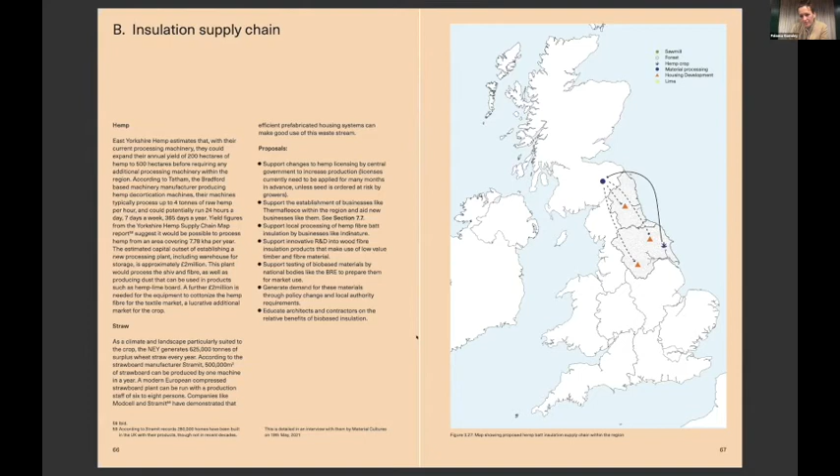There's going to need to be other changes, I think, predominantly in terms of regulation, in order to actually be a kind of kickstarter or drive the market. And then there's quite a lot of infrastructural development that's going to be required in order to be able to process the amount of hemp that we would need.

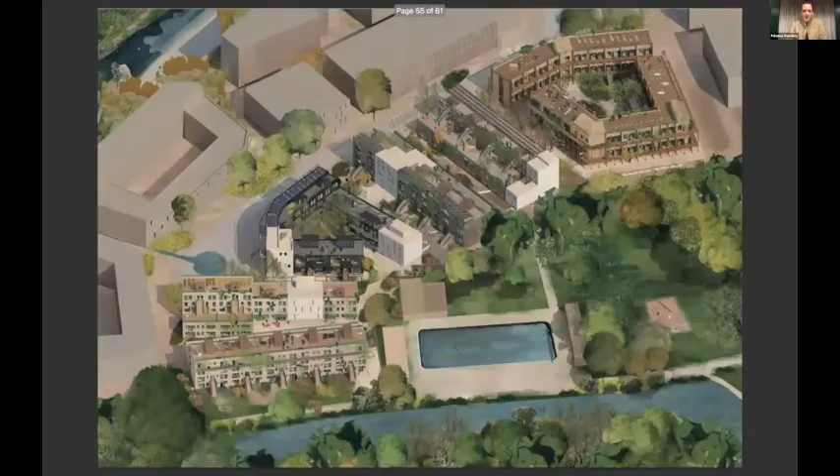We're working on a number of large-scale housing projects, looking at applying some of the principles from flat house, but at a larger scale, and across multiple sites and blocks. So this is just some images of a project that we're developing in the south of England, and then an overview of how that might look at a city/block scale.

But exactly the same principles as in flat house, just scaling up, but really tying into regional producers in terms of timber, but also sourcing other materials such as chalk to go into the project.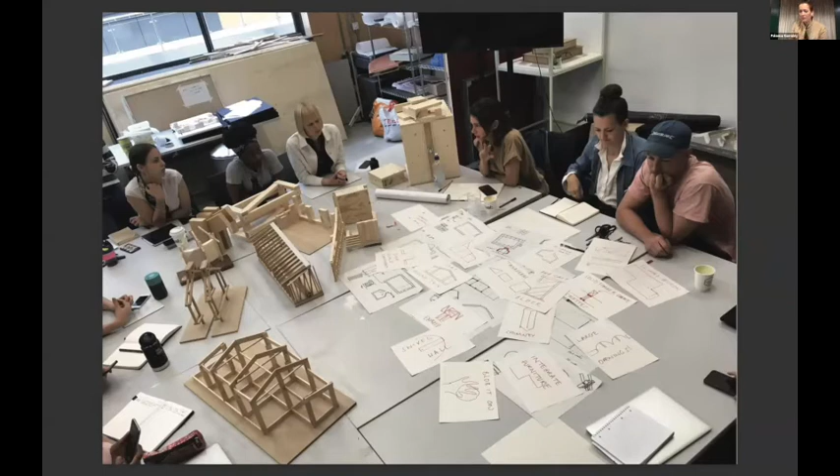And a final little bit about material cultures, which is how important education is in the work that we do, both for generating experimental ideas and research, but also in skilling up the next generation of architectural practitioners to be part of this conversation and to be fully informed and have all the tools they need going out into the world as architects.

So this is just a few projects that we've done with them, which are often one-to-one scale testing, making through doing, understanding architecture by having a real relationship to materials and construction.

So hopefully everybody can see that. Yeah, in full screen mode. Good. This is the nail biting bit to see whether I've reduced the PDF size enough for it to move on quickly and keep up with me.

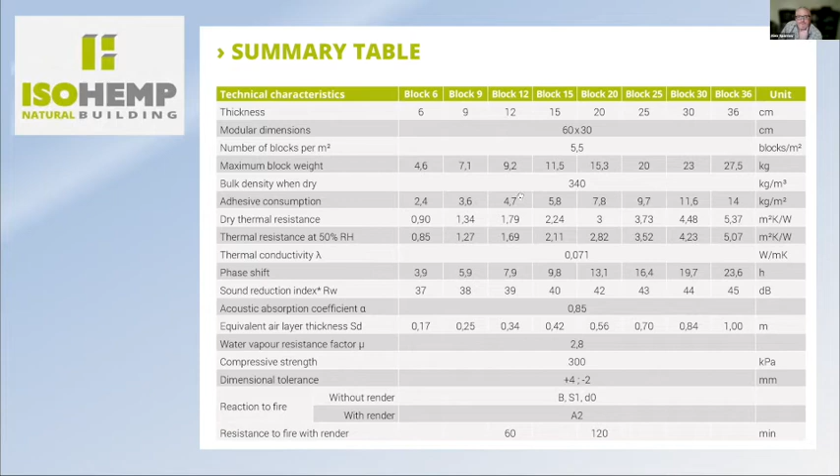So we're going to demonstrate some of the performance of hempcrete with hopefully some nice pictures of some of our projects. I thought we'd start with this whole envelope hempcrete house. As Will was saying earlier, hempcrete can be used in all elements of the building envelope, so it's possible to build a house that has a hempcrete floor, walls, and hempcrete in the roof insulation buildup. You get this complete monolithic envelope made from one homogeneous piece of material wrapping all the way around the structure, complemented with other materials along the way, usually other natural insulations, lime renders, clay plasters and lime plasters.

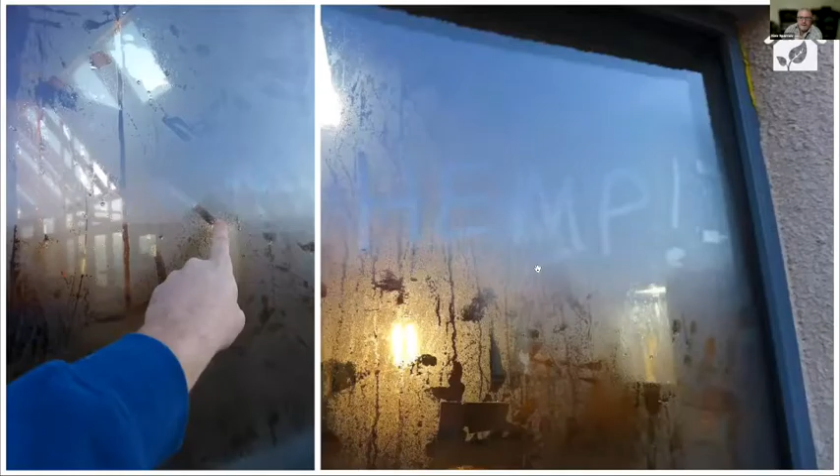This was a visit I did at about 8:30 on a cold February morning up in the Highlands. The condensation you can see on the windows is actually on the outside of the windows. So inside the house is perfectly dry because, as we know, hempcrete has this ability to absorb and release moisture. But in fact the moisture in the external air is condensing on the windows in this unoccupied, unheated, unfinished building because it's retaining warmth.

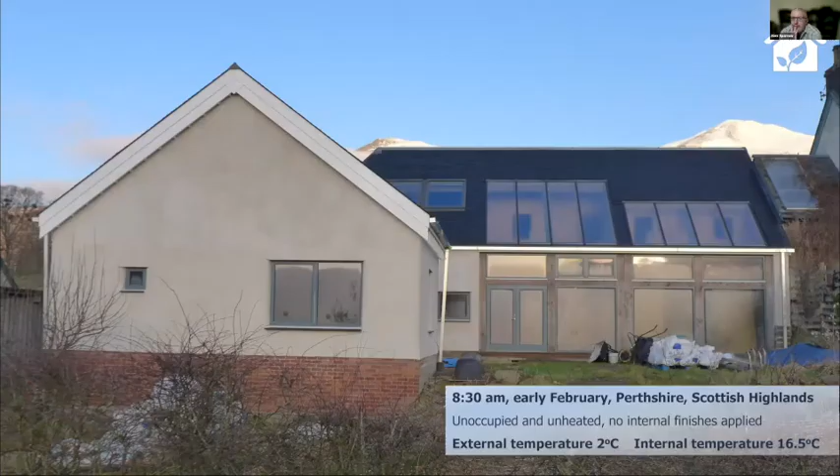You can see from this photo the snow-capped mountains in the background. This is in Perthshire in the Highlands. Early on in February, the external temperature is 2 degrees, which is sort of balmy for that location at that time of year. The internal temperature is 16.5 degrees with no heating at all, other than the passive solar gain from these large south-facing windows.

Even further north, the house we did on Orkney mainland. This time when I visited it's late October. There's no heating system installed in the house. It's unoccupied. It's got wood fibre insulation in the roof, hempcrete walls, and again an insulated floor, but this time foam glass with a lime screed.

To be fair, full disclosure, there is one painter and decorator in there painting the walls, so he's probably kicking out a bit of heat. But again, the house is staying 16 to 18 degrees whatever the weather, and believe me, on Orkney mainland they see all kinds of weather.

So why is it doing that then? If we look at the typical hempcrete performance, there are slight variations with different hempcrete materials, but they're broadly very similar. This again is taken from a hempcrete block performance table, a different block system. You've got the thickness in centimeters of the different blocks along the top of the table, and then you've got the density, which remains constant.

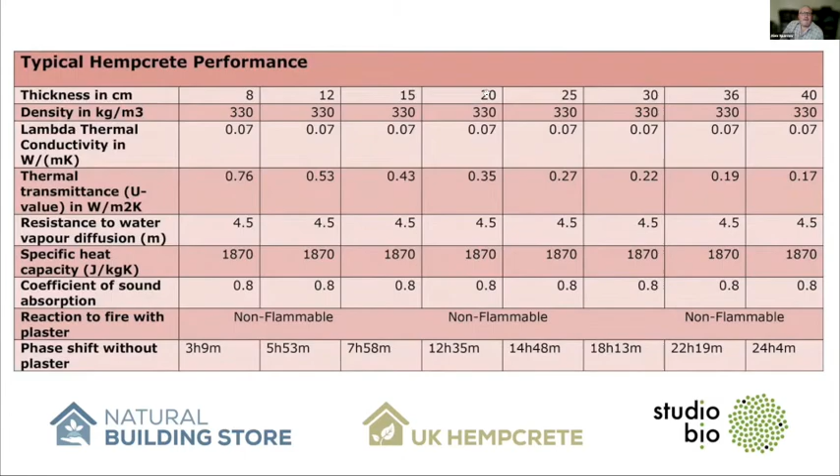Back in 2012, Mike Lawrence and colleagues at the University of Bath looked at an experimental hempcrete building with 200 mil of hempcrete cast around a stud frame, compared with an identical building made from PIR. They heated both buildings, then stopped heating and monitored what happened. In the hempcrete building, the external day-night temperature went up and down as expected, but the internal temperature stayed relatively stable, because that thickness of hempcrete has a 12-13 hour phase shift.

So the time it takes heat to pass through the envelope of the building is roughly the same as the diurnal temperature changes happening outside. That's why you get that steady, almost static temperature in hempcrete buildings, whatever the weather's doing outside. That's what we see when we ask clients how it's performing - they say, well, we're not heating it yet, it's sort of 16 to 18 degrees. This is a low-tech construction method doing something that seems quite high-tech or very high performance.

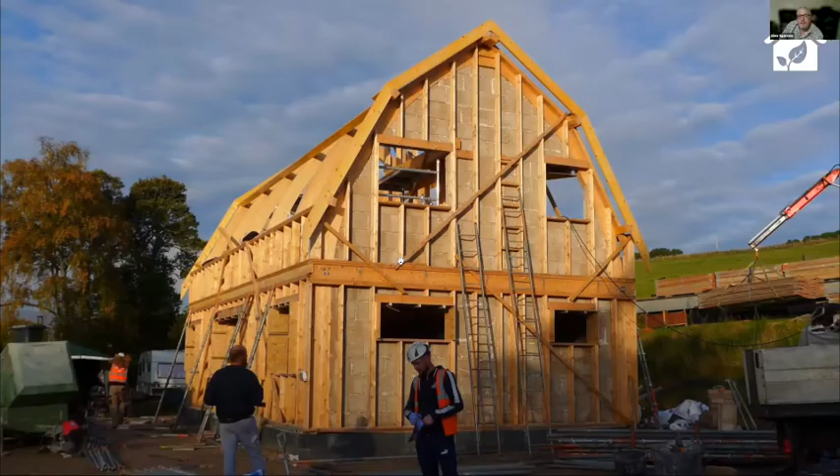As others have said, it's really simple, not rocket science. In this sequence, we've got an internal hempcrete block skin tied back to a timber frame. That internal skin gets built all the way up and is then used as permanent formwork. There's a kind of arched roof structure internally and a mansard roof externally, because the client's brief was an upturned boat, so she got an internal upturned boat. Because this is hempcrete over the roof as part of the roof insulation, we've used a reed board as permanent shuttering to stay in place, and the hempcrete gets cast up over that.

Oh, weird slide transition. Wasn't expecting that.

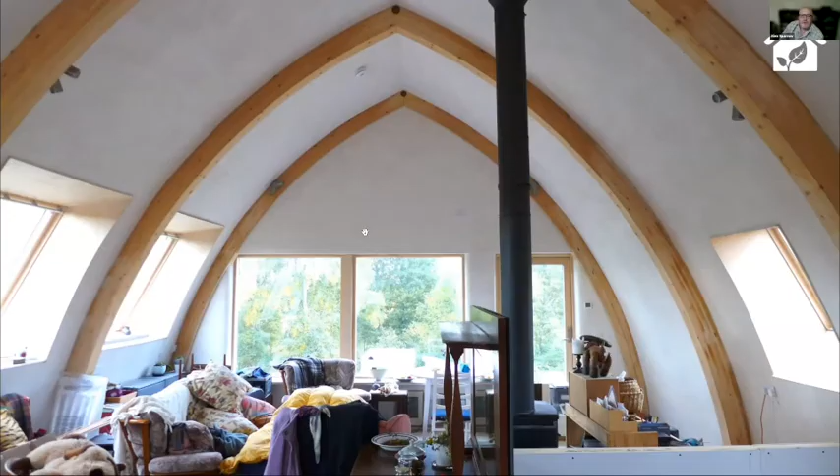Once the hempcrete is cast and dried out, the reed boards get lime plastered, but they stay in place in the building. So that's the building with the external layer of cast hempcrete to cover the timber frame, giving the benefits of that monolithic, homogeneous external material that wraps around and resolves any thermal bridging.

That's the building rendered, and again, lo and behold, it's maintaining 16 to 18 degrees in late October without any heating. Now, another key part of building performance, especially relating to the insulation element - and this is probably arguably less critical in hempcrete buildings than it would be in a lightweight insulation building - is airtightness.

If you have an insulation layer that isn't airtight, air will be leaking out of it, which will compromise your trapped air barrier keeping heat in your building. I love this example - this is one of the companies in America who's sprung up to push forward hempcrete. This is Hempstone, based in Western Massachusetts. This is their first house, built with the client last year, if I'm remembering correctly - these last couple of years seem to have all rolled into one, don't they?

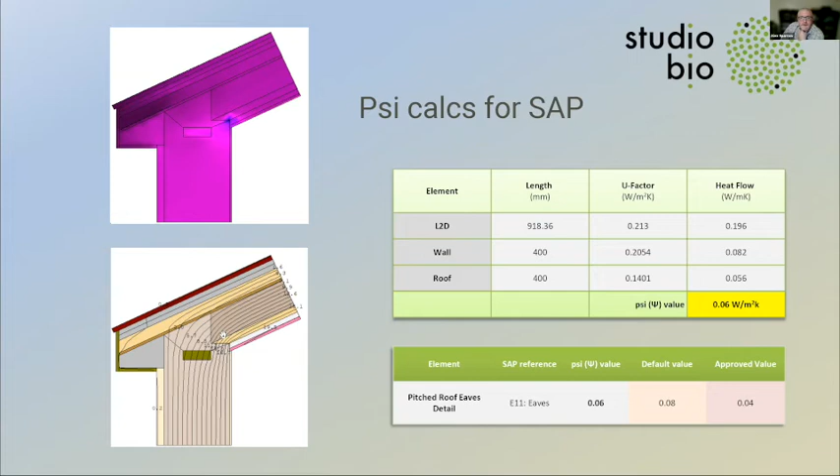As I say, this is different for every detail, but generally hempcrete, because of the way that it wraps around the structure and eliminates thermal bridging, performs really well. In this case, for this eaves detail, it actually came out that it was better than the default value. So that's quite nice, and that happens.

Vapor openness is a key part of hempcrete's performance, as I drew your attention to in the table at the beginning. Hempcrete as a material is highly vapor open. That's to do with the vapor openness of the finishes - lime or clay plasters are very open, as are lime renders. Typically hempcrete's used with a range of natural materials: stone, clay, timber, and all of those materials have really good - well, in the case of stone, depends which stone - but they have a degree of vapor openness.

I thought I'd focus on this, which is hempcrete used as an internal solid wall insulation in an old stone barn up in West Yorkshire. The vapor openness is generally a good thing. It stops water getting trapped in building fabrics, which is good for the longevity of the building. It has some health and wellbeing implications for building occupants as well.

So again, here in this old mill building in Derbyshire, when you're doing internal solid wall insulation with a vapor open material, you need to consider the risk of interstitial condensation. There's a convention that really, when you're doing internal solid wall insulation, depending on the original masonry wall and the exposure of the building, you tend to aim for nothing lower than 0.3, because the risk is that you're making the original masonry too cold and increasing the risk of condensation as it passes out of the warm vapor open insulation.

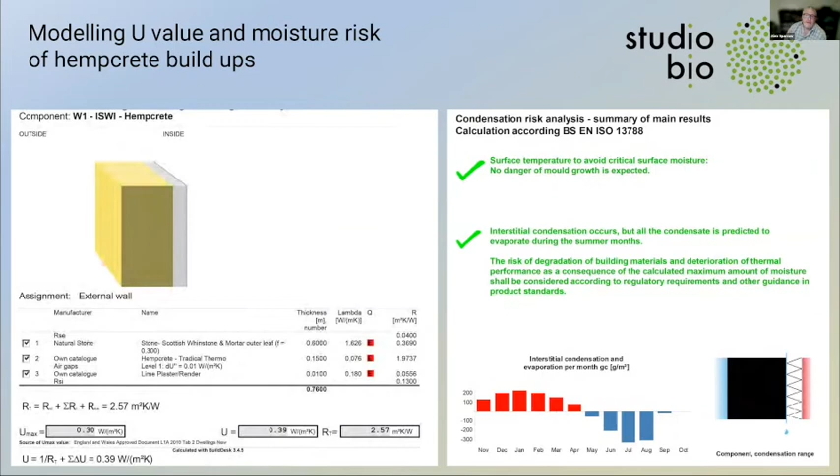Interstitial condensation can build up at that point on the interior of the stone wall. So all of the details that we do are checked based on the climate data in as close to the location as we can find a weather station, to check that there isn't any risk throughout the whole of the year of moisture building up and potentially causing a problem. Although of course hempcrete, compared to other biomaterials, is relatively well protected from that because of the lime binder.

So moisture buffering, really key part of hempcrete's performance. It's really good for building occupants, because what happens is the hempcrete wall passively absorbs moisture through the lime plaster. It condenses in the pores of the hemp shiv, that's the aggregate in the material, when the building is humid. And then when relative humidity drops, it releases that moisture out again into the room. So it's passively regulating moisture to a level between about 40 and 60% relative humidity, which is really good for the health of those who are living in the building.

So I love this bit of research.

This is Eshrar Latif and co at Bath, who did some research where they got blocks of hempcrete and applied different things to the surface to see whether they would affect the overall moisture buffering performance of the hempcrete. I'm presenting this fairly quickly, but I've put the reference so you can look it up. They had about 10 different assemblies.

The first assembly was just hempcrete, hemp lime. The second one was hemp lime plus lime plaster. Both of those perform in the excellent band for moisture buffering potential, as compared to all building materials and how well they buffer moisture.

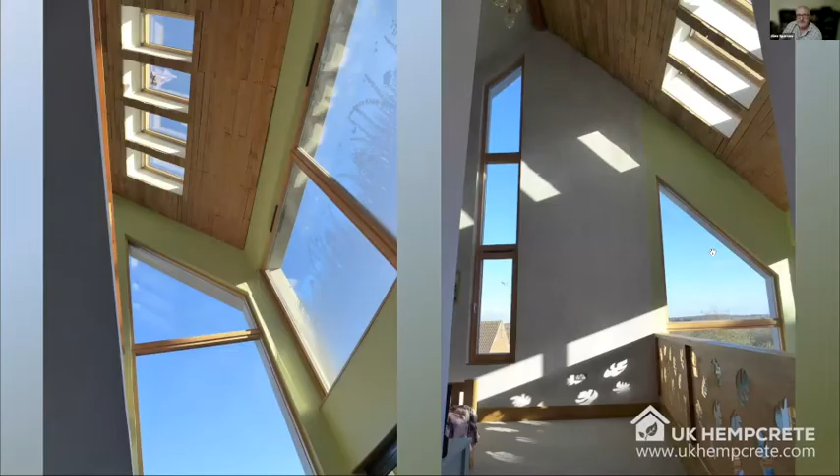Caroline told me that before they moved into this house - Caroline's severely asthmatic - she would typically be hospitalized at least once a winter, as she described it to me, and she used 2 inhalers a week typically, and had done for years wherever they were living. Within weeks of moving into their new house, she hardly uses an inhaler at all. That's really dramatic, and I think they've done a lovely job with the design, which was done by a member of their family. It's just a really lovely, healthy place for them to live and bring up their children.

Contractor training - we must be getting near the end. This is a building we didn't build, but we supplied the materials. This is hempcrete block here with a steel frame structure, with a steel cladding system and wood fibre insulation, and then natural timber cladding. This is William's Den up in the East Riding of Yorkshire.

As other speakers were making the point, if you're supplying hempcrete blocks, you don't really need contractor training, because anybody who can lay blocks can lay hempcrete blocks. So during my site visit, the only thing I pointed out to them was that they didn't really need to use a petrol disc saw to cut them, and that an old hand saw, or as Will says, an alligator saw will do just as well.

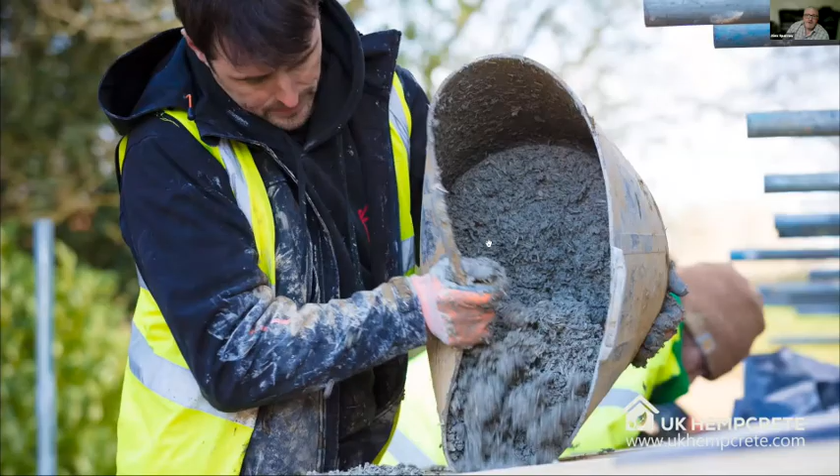Here's some contractors being trained in the cast method on one of our sites, and that is, as other people have said, something that requires more specialist training. So either you train people to do the cast on site - it isn't rocket science, but there's a few things you need to know about how the material differs from conventional construction materials - or you change the material and supply blocks so they don't need any training.

This is the inside of Native Architects' new office just outside York, and this is some cast hempcrete, which I trained their staff to do themselves in their conversion of an old granary building. So you see, it's so easy, you can teach architects to do it.

And that's the end of my presentation. If anybody's got any questions, I feel I may not have left that much time for questions in this session, but you know where we are, so please do get in touch.

Thank you so much, Alex. That was brilliant, and I love that little dig at the end. That sounds like a dream Christmas party, learning how to cast your own hemp. We've still got over 100 people in the room.